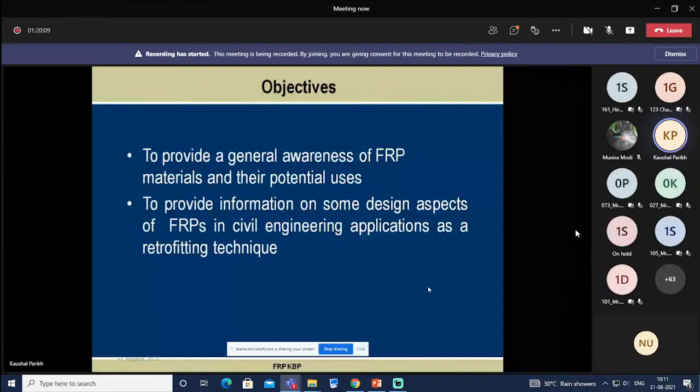Now, let us start with the introductory part. We know that humankind, for so many millennia, has used stone and timber for construction purposes as building materials from the structural point of view. And for the last 200 years, steel and concrete have been very, very popular, and there are so many buildings, so many types of structures which have been constructed using these two materials, specifically steel and concrete.

So the modern urban landscape is defined basically by steel and concrete: roads, sewers, highways, buildings, bridges, and many, many complex infrastructures which have been made specifically of steel and concrete. Now, as we know, most of the world's population depends on a major, extensive infrastructure system.

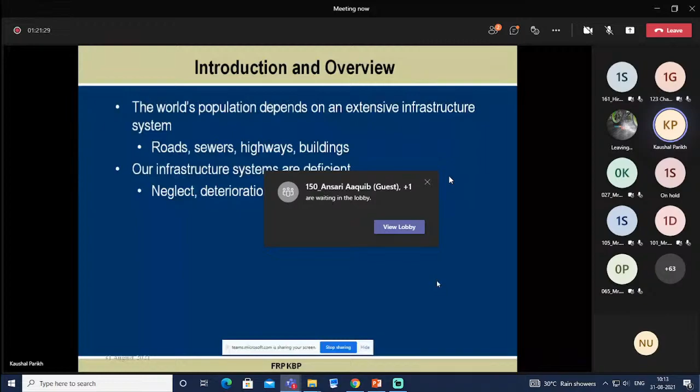But when we are using these infrastructure systems, which have been made specifically of steel and concrete, then definitely, because of the limitations of each individual material, deficiencies will be generated. They become deficient for certain reasons, and because of those reasons, we have to think how we can prevent this deterioration, and if deterioration is there, then what to do for those structures.

So as one of the best solutions, lasting for 20 to 30 years, FRP, that is fiber reinforced polymer material, is gaining popularity as far as civil engineering is concerned. As the history and the literature review show, FRP was mostly used in the aerospace industry as well as mechanical engineering. But now it is gaining popularity as far as civil infrastructure application is concerned.

And the reason behind this is that the FRP cost has decreased. Why has the FRP cost decreased? Even though I belong to one of the small cities of Gujarat, within the surrounding area of 180 kilometers, FRP products are manufactured in industry. It is true. So in the past, only some companies made FRP, but now there are various companies making FRP. Hence, because of that, the cost has decreased.

So now there are certain reasons that lead to degradation of existing structures. One of the reasons is corrosion. We know how corrosion takes place, so I will not discuss much what exactly is going on. But the final product is seen here: what really happens and how the strength has decreased because of corrosion is shown with the end results.

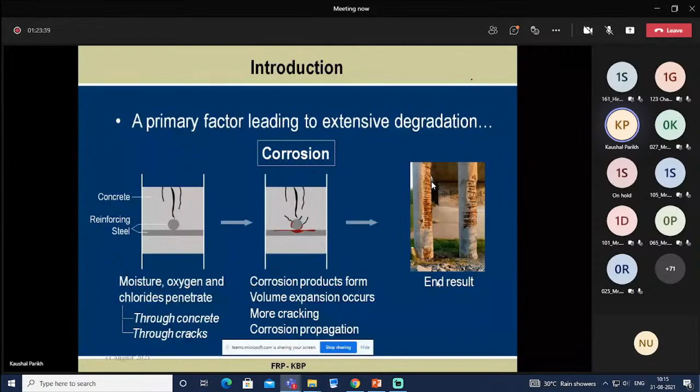Another reason for deficiency in existing structures is environmental effects, like wet and dry conditions, freeze and thaw conditions, and chloride ingress in the existing structures; the existing material will behave accordingly and deficiency will be generated.

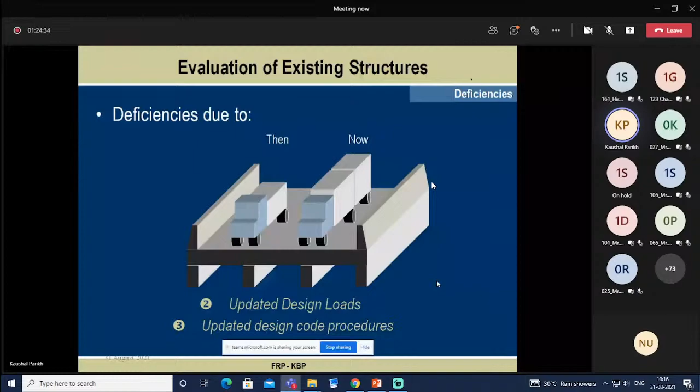Another reason evaluation of existing structures is needed is that deficiency is generated because of updated design loads and updated design code procedures. Also, because the population increases and new developments are there, the traffic will be heavier, and because of that the existing structures will become deficient. Another reason, as I told, is that traffic increases. These are certain reasons deficiency will be generated.

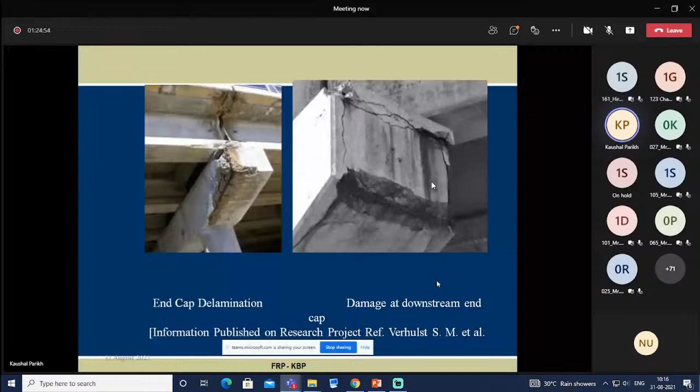Deficiency will also be generated because of seawater, as shown in the figure. These are certain deficiencies, like the end cap delamination as far as the bridge is concerned. See the various images. And specifically, earthquakes will lead to damage in existing structures.

So two types of questions may arise in our mind: why should repair, restrengthening or retrofitting be carried out with the same material? It means, why should it be carried out with steel and concrete itself, and why are we going to repeat the cycle? In the same scenario, if we do the repair with the same material, then a similar kind of deficiency may be generated.

So why are we not switching to another new, innovative material, that is the FRP material, because of certain advantages? The first is light weight. It is very lightweight in comparison with concrete and steel, so it is very easy for us to install anywhere.

It has a high strength. I'm going to show you the next slides, which clearly show that it has a very good high strength, approximately 5 times that of steel. Obviously, it is corrosion resistant, with respect to certain ones.

When we discuss durability in the same series, you can see that certain FRPs may lead to some corrosion with certain chemicals. But for the majority, the corrosion that affects steel does not occur in FRP, which means it is a durable one. Also, it is a highly versatile material, meaning it can be used for any kind of project and you can put it at any place.

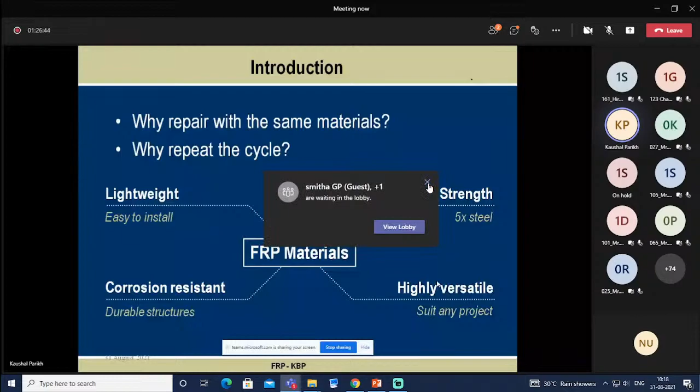Now, there are certain reasons for the need for composites. As we know, a composite is a material which is a combination of two or more materials. One of the reasons stated here is high strength and stiffness, meaning FRP has a very high strength and stiffness to weight ratio, and it is approximately 2 to 10 times as strong as steel plates, while the weight is only about 20% of that of steel.

This property enables thinner sections designed for longer spans, as well as ease in site handling for laborers, and that reduces the labor cost also. Weight reduction adds seismic resistance, speeds erection, and saves construction cost due to the reduced weight of the structure.

As I stated earlier, it has a high corrosion resistance. Also, it has a non-magnetic property. It has low creep and better fatigue life; creep and fatigue are two words we frequently use as far as concrete is concerned. But here FRP has low creep and better fatigue life, better thermal properties, lower maintenance cost, and, importantly, flexibility of shape.

Because of that, it is possible to produce FRP products in various shapes and sizes like cables, rods, flat bars, panels, reels, fabric, sheets. So this offers a great flexibility as far as shapes and sizes are concerned.

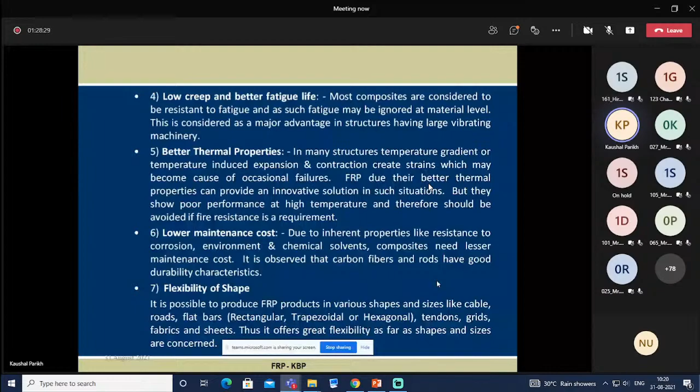While for steel, a major ductile behavior is seen after the yield point. So the advantage of FRP is that it has a higher capacity to resist load, a very high load carrying capacity. But the disadvantage, as you can also see, is ductility: steel is a ductile material, while FRP is nothing but a brittle material.

So here some typical properties are shown, the same thing we discussed in the previous slide. One important thing is that FRP has a lower strain at failure, which leads to brittle behavior.

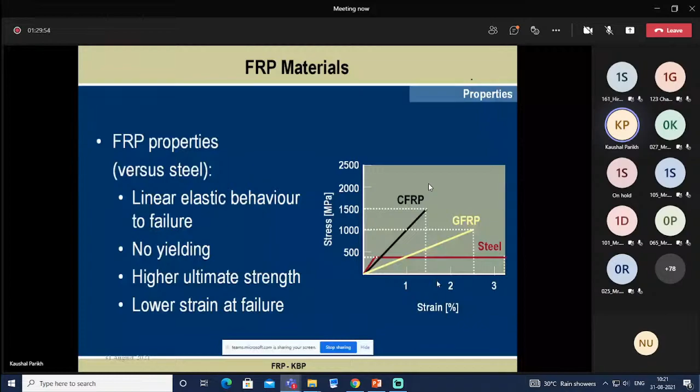So what is FRP? FRP is not a single material, but a composite material which is a blend of high strength, high modulus fiber and a hardenable liquid matrix. It is the summation of the fibers plus the matrix.

So the physical and chemical properties of fibers and matrix resins are to be discussed here, because the fiber has its own properties, the matrix has its own properties, and when we combine them, the property is slightly different from both constituent materials. So the bonding of the aligned fibers by the softer matrix results in the FRP composite material, which has superior properties, specifically in the fiber directions, if we apply it in the existing structure.

So exactly, the definition of FRP is a material which is created by the combination of two or more materials on a macroscopic scale to form a new and useful material with enhanced properties that are superior to those of the individual constituents alone. We know certain composite materials like concrete.

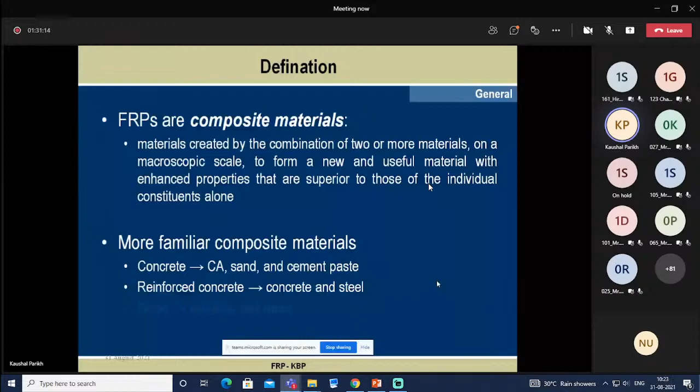Reinforced concrete is also one of the composite materials, that is, concrete and steel. Wood and our bone are composite materials. Similarly, FRP is also a composite material. Now, in this FRP, 50% to 65% will be carried by the fiber part and the remaining part by the polymer resin matrix.

Both materials have their own uses as far as the composite is concerned. The fiber reinforcement carries the load in the design directions, and the fibers, being the main load carrying constituent, give FRP its strength. So the question may arise, what is responsible for the strength in FRP? It is nothing but the fibers, while the polymer resin matrix has a lower load carrying capacity,

and the resin acts as a medium to transfer the stresses between the adjoining fibers through adhesion, and also provides protection for the material from UV and chemical damage. So here, one thing is to be noted, that the polymer resin matrix doesn't provide the load carrying capacity, but it provides the bonding between the FRP and the older construction.

So it is also an important one. We can't say that only fibers are important; the polymer resin matrix has its own value here. And whenever a certain failure is considered, this polymer resin matrix will become a weak link.

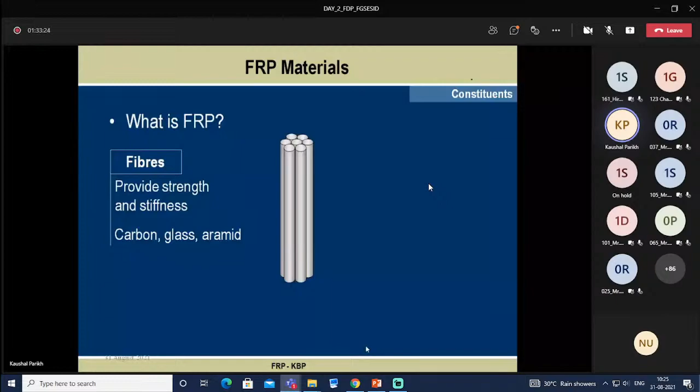So now, what is FRP? As we discussed, there are two parts: fibers and matrix. The matrix protects and transfers the loads between the fibers. Three types of fibers have been written over here: glass, carbon, aramid, and three types of matrices are shown over here. We will discuss the types of matrix in detail in the next slides.

So when we combine the two things, fibers and matrix, we get an FRP having an intermediate strength, not more than the fibers, not less than the matrix. Now, the polymer matrix component has critical functions. First, it binds the fibers together,

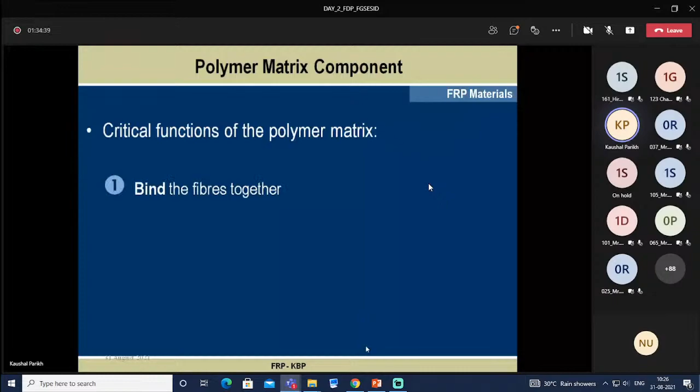it protects the fibers from the environment and abrasion, it separates and disperses the fibers throughout the composite, and it transfers the force between the individual fibers. A very interesting and important point: it transfers the force between the individual fibers.

So now, what is a polymer? A polymer is an organic compound comprised of long chain molecules consisting of smaller repeated units called monomers, and there are two types: thermoplastic and thermosetting polymers. Examples of thermoplastics are polyethylene, nylon, polyamide, while thermosetting polymers are polyester, vinyl ester, epoxy.

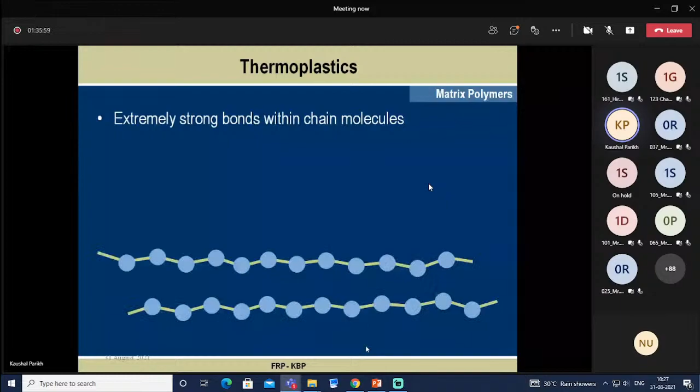Now, if we take the first, the thermoplastic as a matrix polymer, it has extremely strong bonds within the chain molecules. You can see in this image that along the molecules there is very high strength, good strong bonds. But these chains are held by weak van der Waals forces, and because of the weak van der Waals forces, the molecules can slide past one another on heating.

So because of heating, this becomes non-stable. The polymer can be reversibly softened, and hence it is not currently used from a civil engineering perspective. But in thermosetting polymers, the molecular chains are cross-linked through chemical bonds.

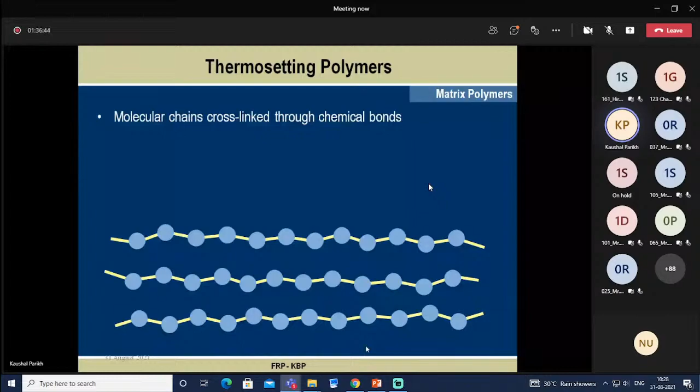There are good, strong bonds along the molecules, but they are cross-linked through very strong chemical bonds, and hence they cannot be reversibly softened and cannot be bent on site. So there is very little possibility of deterioration at elevated temperature. So this is the matrix, specifically the thermosetting type of polymers commonly used for infrastructure FRP, and those are the epoxies, vinyl esters and polyesters.

Let us understand first the polyester and its use, then the vinyl ester and its use, and then the epoxy and its use. Polyester is inexpensive, easy to process and widely used for FRP components. Just like we know the railway track is made from the I section of steel, similarly when you pass along the roads, visualize a high tension line going on, and fencing carried out.

In certain places the fencing, the channel sections, or certain vertical angle sections are not made of steel, but of FRP components. As far as I know, in Gujarat various factories are making this kind of FRP component, and in that case they are using polyesters. The vinyl ester is specifically used for FRP bars, meaning reinforcement.

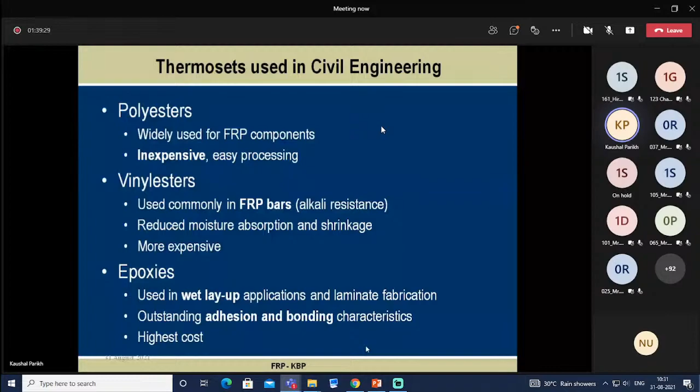The factors influencing fiber suitability for any project are strength, stiffness, environment and durability, cost and availability. Cost is one of the major influencing criteria. And if cost is not a concern, then strength is one of the influencing criteria.

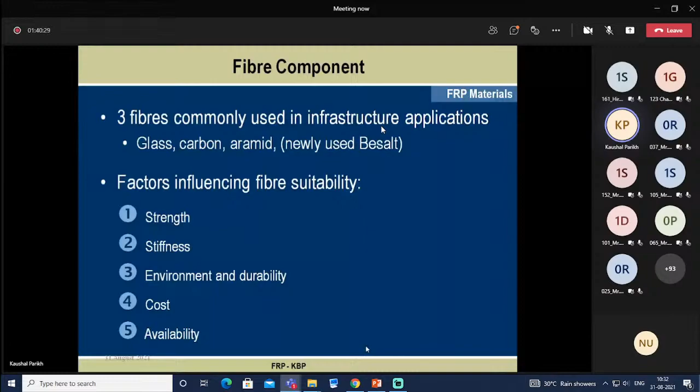Now, if we study glass fibers, we all know that in concrete people use glass fiber as an individual addition. That we are not discussing right now. The glass fiber FRP sheet that we are going to discuss is inexpensive, lower cost compared with the alternatives, and easily available in the market. There are types like E-glass and R-glass, the resistance type, having higher strength, moderate modulus and medium density. Generally, glass fiber FRP is used for non-weight and modulus critical applications.

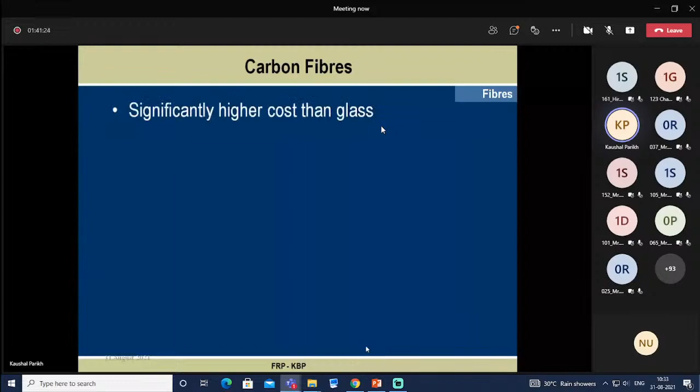Carbon fibers are significantly higher in cost than glass, with various varieties available in the market, but compared with glass they have higher strength, superior durability and fatigue characteristics, and a very high modulus.

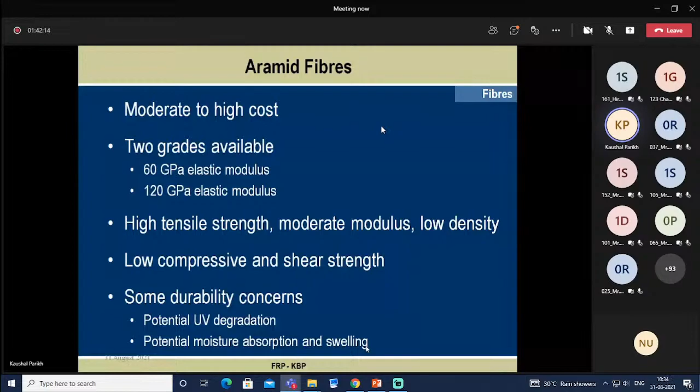Another one is aramid fibers, having a moderate to higher cost. Generally two different grades are available in the market: 60 GPa elastic modulus and 120 GPa elastic modulus. It has a high tensile strength, moderate modulus, and low density. But there are some specific durability concerns: it tends to degrade because of ultraviolet rays, as well as potential moisture absorption causing swelling.

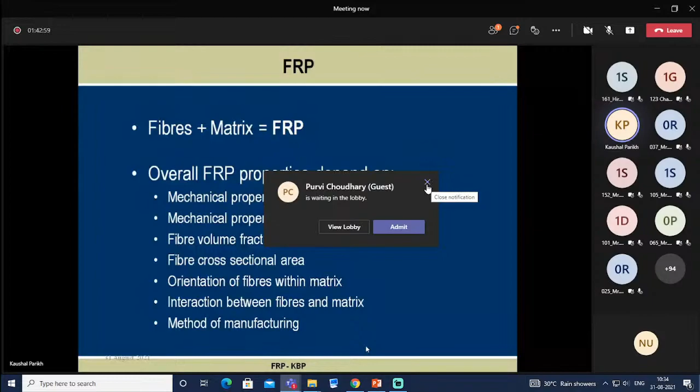As discussed, fiber plus matrix is FRP. As far as structural application is concerned, overall FRP properties depend on the following factors: mechanical properties of matrix as well as fibers, fiber volume fraction and fiber cross-sectional area, and importantly, the orientation of fibers within the matrix, which is a key factor. Other factors are the interaction between fibers and matrix, and the method of manufacturing, which also affects the final properties of FRP.

Now, the influence of fiber orientation and its specific use. As we know, FRPs are orthotropic materials, meaning they are directionally dependent. In the market, various FRP laminates for retrofitting are available.

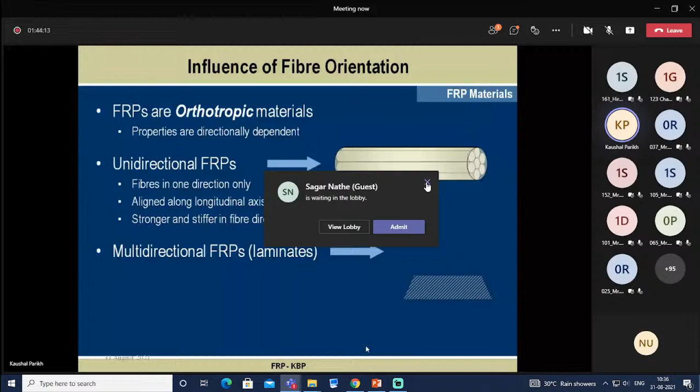One of them is unidirectional FRP. In this case, the fibers lay in one direction only, aligned along the longitudinal axis. During structural use, we apply these FRPs in such a way that we can use that strength, so it is stronger and stiffer in the fiber direction.

Now, switching to multi-directional FRP laminates, fibers in various directions are manufactured, majority in two directions, so the properties can be tailored and the behavior can approach isotropic. Unidirectional FRP is commonly used in infrastructure applications, but in certain cases bidirectional or multidirectional FRPs are also used for structural applications. A typical image shows the various types of FRPs and their components.

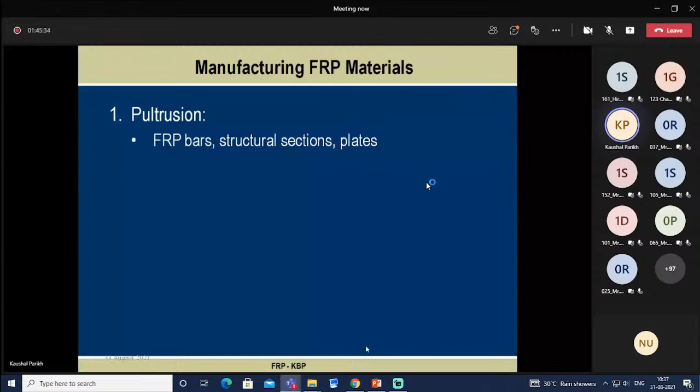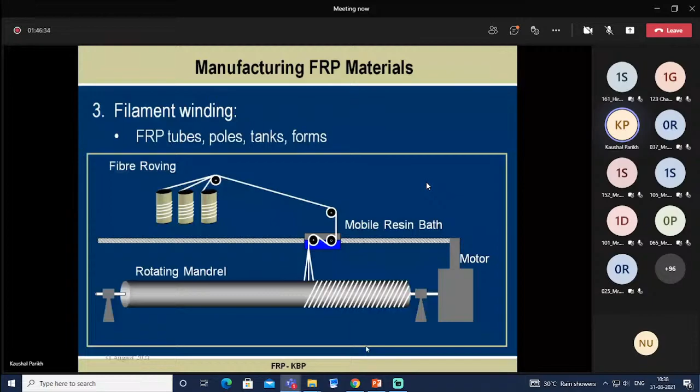Another technique is filament winding, from which FRP tubes, poles, tanks, and forms are made. A typical image has been shown here.

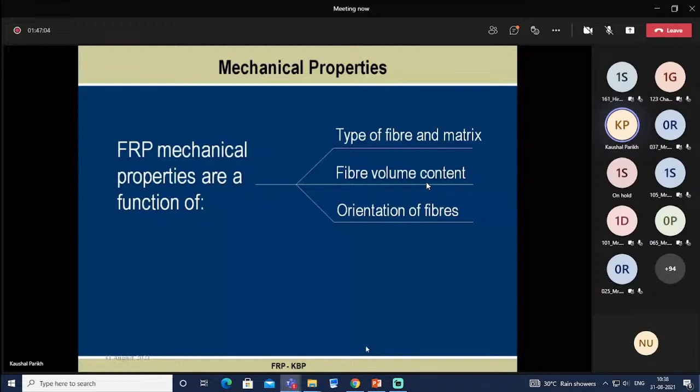The FRP mechanical properties are a function that majorly depends on three factors: the type of fiber and matrix, fiber volume content, and orientation of fibers. Now some typical example applications have been shown, related to where and under which circumstances FRP is to be used.

For shear, we know that shear strengthening of the beam is generally taken care of near the support conditions, specifically on the side of the beam. Here the FRP is applied for shear strengthening on the side face of the beam, or we can apply a U-wrap. The fiber directions here are perpendicular to the longitudinal axis of the beam.

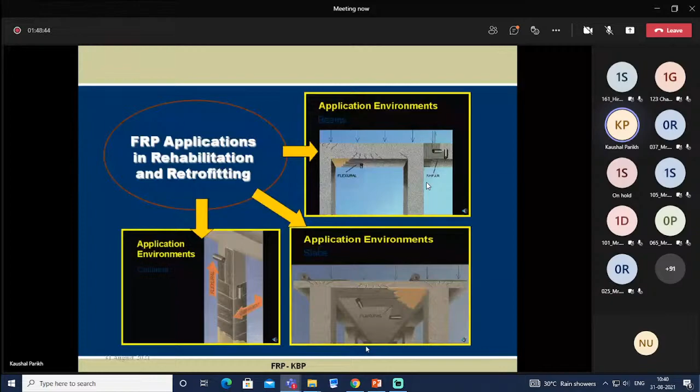Let us discuss the installation technique. The first one is the wet layup application, used with flexible sheets saturated with epoxy adhesive. This can be applied on the flexible sheets in one or two coats, and that has to be placed on the concrete surface.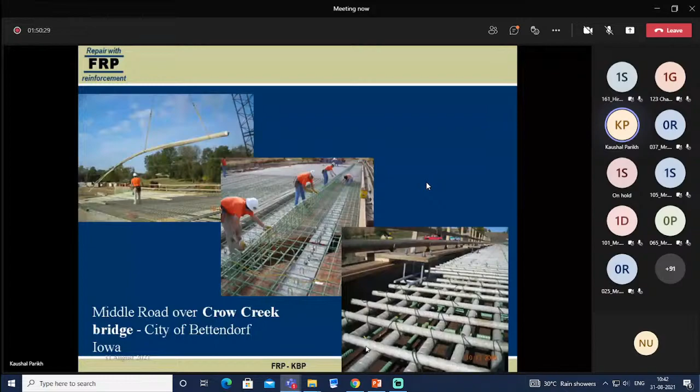One of the typical applications has been shown here. Some case studies are shown, this is one typical example of FRP bars. This is an application where re-strengthening of the masonry wall and the RCC slab used pre-cured CFRP strips. There are two different terminologies: strip and sheet. Sheet is a very flexible terminology, while strip has slightly more thickness, giving it a kind of rigidity in comparison with the sheet.

Another typical example shown here is the San Francisco City Hall building, which was retrofitted in the mid-90s. You can see how old this building is that was retrofitted. The basement of this building included a number of hollow clay tile walls that were weak in shear, as seen in the image.

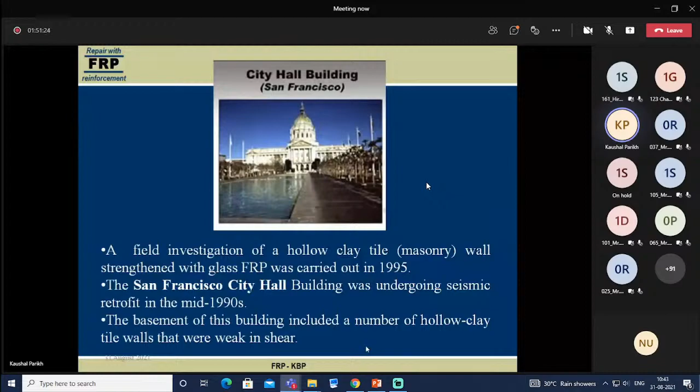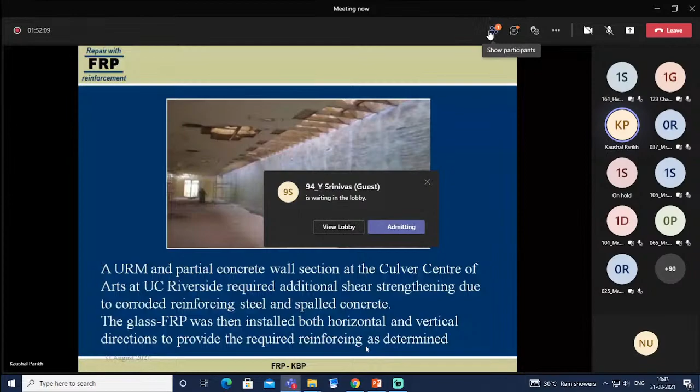One typical example: URM and partial concrete wall sections at the Culver Center of the Arts at UC Riverside required additional shear strengthening due to corroded reinforcing steel and spalled concrete. Glass FRP was installed in both horizontal and vertical directions to provide the required reinforcing as determined by calculation.

Now let us look at the Indian scenario, with certain applications specific to India. As we know, humidity cycles accelerate deterioration in concrete, and India has monsoons with 80% of rain falling within 2 months. Because of this humidity, there is definite deterioration to be accounted for. The marine environment is the worst in India, which has a long coastline where marine weather prevails. So in India, structures require heavy repair within a decade of construction.

We know how construction is also carried out by contractors in the nearby area, so deterioration will need to be addressed in the near future after construction. There is a huge scope for strengthening and retrofitting in India. The overall composite market in India is relatively small compared to other parts of the world. A few years ago, the consumption level of composites in India was only 30,000 metric tons, compared with China's 2 lakh metric tons.

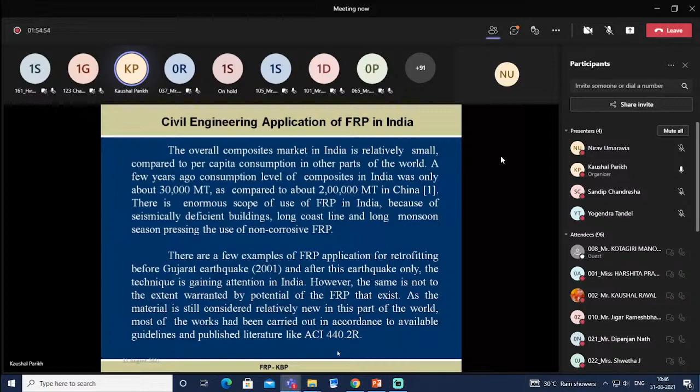In India, in the field of education and research related to FRP construction, various IITs, IISc, the Structural Engineering Research Center (SERC Chennai), FRP Institute Chennai, the Indian Society for Advancement of Material and Process Engineering with headquarters in Bangalore, and also DRDO are certain agencies doing testing and research work, and this is ongoing.

Now let me discuss the first case study: the case study of Bhopal, where there was a problem with the old age home. The consultant was Skyline Consulting Engineer. Here the project was to strengthen the columns at the basement level. The name of the building itself, old age home, tells us its function.

This structure was newly constructed having 5 floors, and this 5-story old age home showed signs of cracks at the basement level columns immediately during the finishing stage of the project. Standard NDT tests were conducted and they concluded that the columns had not achieved the required grade of concrete. So we can see how the construction was carried out at the initial stage. One of the options taken was to use FRP jacketing at these locations.

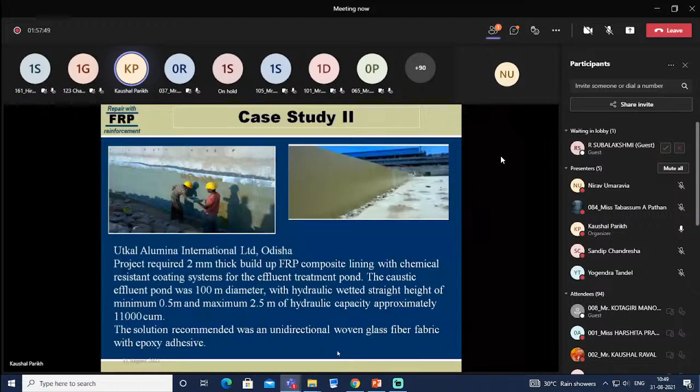This is the third case study, of Kolkata Ahinsha Properties, where strengthening of the column with externally bonded FRP was used. This building is located at the heart of Kolkata, and the project requirement was the strengthening of the column needed because of the additional loads of a proposed swimming pool on the roof of the building.

After so many years of use, they proposed to build a swimming pool on the roof, so huge loads would come onto the building. The solution was the use of externally bonded FRP material by confinement to increase the compressive strength of the RC columns, using certain design guidelines. In each case, they used certain guidelines since there is no Indian standard for this even today. So they used FIB Bulletin 14 Switzerland guidelines based on the information available.

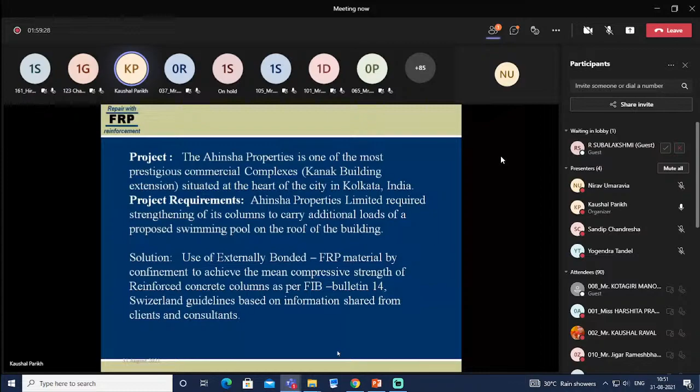Another case study is the Bharti Airtel Data Center in Bhubaneswar, Orissa. This building was made in 2012, and the data center is located at the center of Bhubaneswar, Odisha. Due to technical requirements, strengthening of the beam, slab, ceiling, and columns was needed to accommodate the additional load of the UPS.

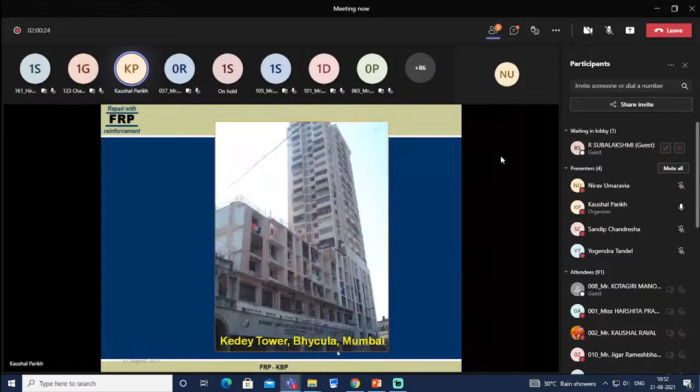Kedey Tower, Byculla, Mumbai. One of the images has been shown over here. Here the problem statement is there. This particular building was proposed for another 4 stories on top of the existing 20 stories. So originally the building was made up of 20 stories, so the design had to be carried out for the 20 stories to take care of the loads.

But when we go for the proposed new 4 stories, strengthening of the existing components of the structure has to be carried out. The load carrying capacity of the main columns was good enough to carry the extra load according to the previous Indian code. But according to the revised Indian Standard code, the factor of safety of the main core columns required to be enhanced, and they found a solution of one layer of CFRP applied parallel to the axis of the column

to prevent buckling. Please try to understand that the FRP sheet is applied with respect to certain directions when we are using the unidirectional one, as the unidirectional one is gaining popularity from the infrastructure point of view. And 3 layers of CFRP are applied perpendicular to the axis of the column for the confinement. See the image after the construction of the 4 stories.

The next is the Century Hotel, Mumbai. Another case study is there. This is the problem of one of the beams. It has been clearly shown that the original depth of the beam is 1150 millimeters, and for a certain reason they want to reduce the depth of the beam, cutting it down by 350 mm. They want to remove the upper portion of the beam so that the upper floor can be used.

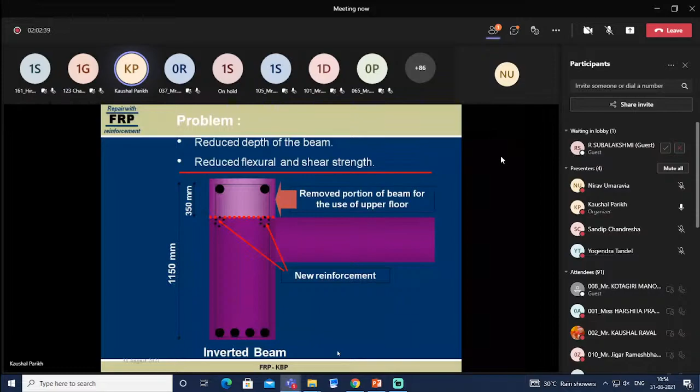So definitely, as the top reinforcement bars have to be cut and the depth has been cut down, there will be a drastic reduction in the flexural and shear strength. So here the solution, as shown in the image, is CFRP applied at the bottom to increase the flexural strength of the beam, as well as wrapping near the support. You just see the figure. This wrapping is applied at the end of the beam as a U-wrap to increase the shear strength of the beam.

And I repeat that this is not carried out arbitrarily. Use certain guidelines, and based on those design guidelines we have to carry out the design procedure and systematically use this in the real application. Certain images are shown over here. These are certain images for the same thing.

The last case study is about the Chennai Corporation in Tamil Nadu, India, which used fiber wrap technology maybe 10 to 12 years ago to fortify its old civic structures, including buildings and bridges, against earthquakes. The fortification was initiated in the wake of the city being upgraded to seismic zone 3 a few years ago. Also, the work on the Kodambakkam Bridge and Ripon Building, more than 150 years old, has already been completed by the Chennai Corporation. So FRP as a retrofitting material is exhaustively used in India also.

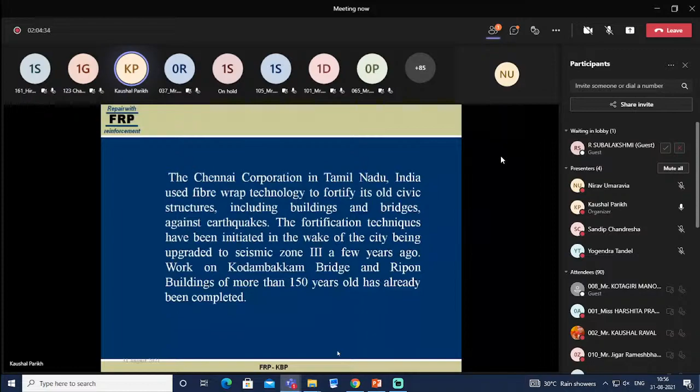Let me explain the FRP application procedure. First, remove all unsound concrete and loose particles. Then arrest the corrosion. If there is corrosion, remove that particular part and restore its original shape. Grind the corners and make the surface smooth and undulation free. Then apply the adhesive, made up of two different components, the primer and saturant, as far as the wet lay-up application is concerned.

After application of the adhesive, press the FRP wrap or strip by hand. Then use a roller to remove the entrapped air. Put another coat of adhesive and then apply protective coatings. See certain images. I have a 1-minute video to show over here. First, open the pore structure, remove the laitance, paints, debris, curing compounds, etc. Make a clean surface so that the contact between the FRP and the older structure is proper.

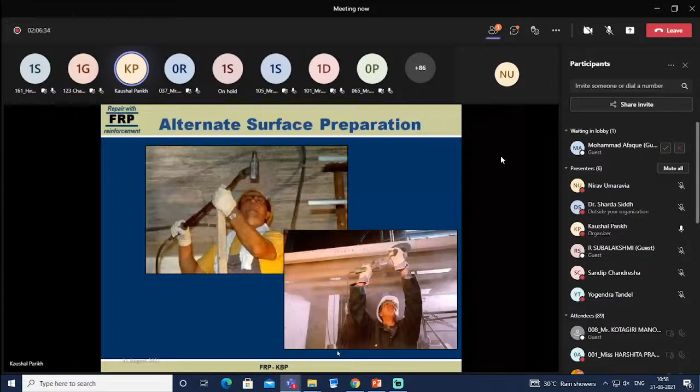And this is also the procedure of the alternate surface preparations. See here, the curved surfaces have to be carried out so that there should not be any kind of stress concentrations; the connections at the junction will be taken care of. So round corners of a specific radius have to be made, removing all the imperfections and laitance; smoothing and levelling have to be carried out.

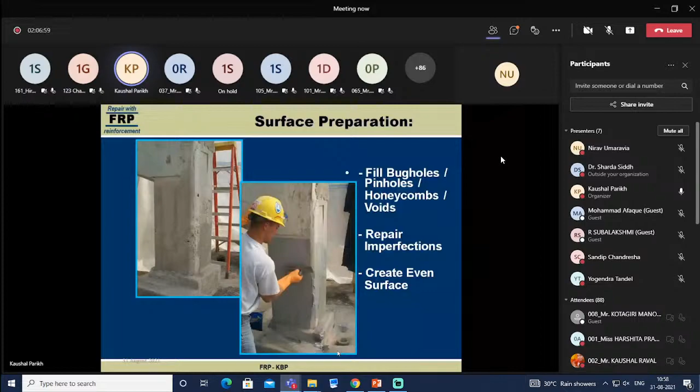Fill up the bug holes, pinholes, honeycombs, voids, repair the imperfections and create an even surface. Then apply the priming to the substrate. Now, depending upon the manufacturing company, certain companies tell us to apply the priming before application of the FRP sheet and carry out the curing of the priming for 24 hours.

Certain companies say 48 hours, certain maybe 12 hours, depending upon the manufacturing company and its regulations that we have to follow during the retrofitting. So this priming will create a feasible environment for the FRP sheet for the applications to the older structures.

Then applications of the FRP. So now one image clearly shows the manual wetting. Manual wetting means what? After the curing period of the priming is over, apply the FRP on the structure and then apply the saturant, another chemical, that is epoxy. So that is nothing but application of two different components of FRP directly at the site. That is the manual wetting.

And the secondary image shows automated wetting. It means the epoxies and FRP are ready-made at the factory and directly applicable; just apply the sheet on the concrete surface. Some typical examples or applications are shown here in certain images.

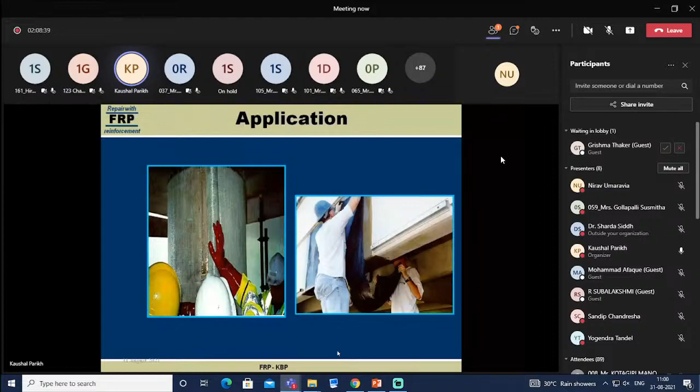So after application, the air voids between the older structure and the FRP have to be removed. And this is the finished product. In finished products, we can apply coatings for aesthetics, UV protection, and heat protection as shown in the figure. Now, let us continue. Before I switch to the durability aspect, let me show you a 1-minute video.

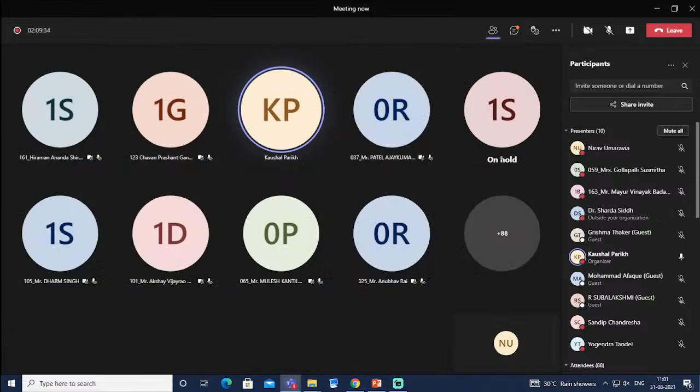Protect. Nirav sir, is it visible? Tandel sir, is it visible? Is it visible? The video of 1 minute is visible. The voice is not there. No, sir, not yet visible. Just 1 minute, hold on. Tandel sir, is it visible?

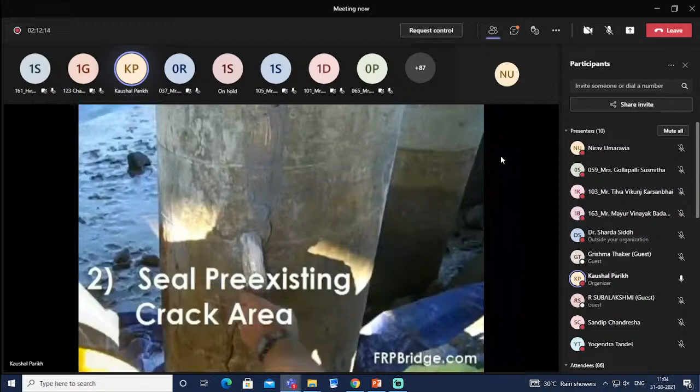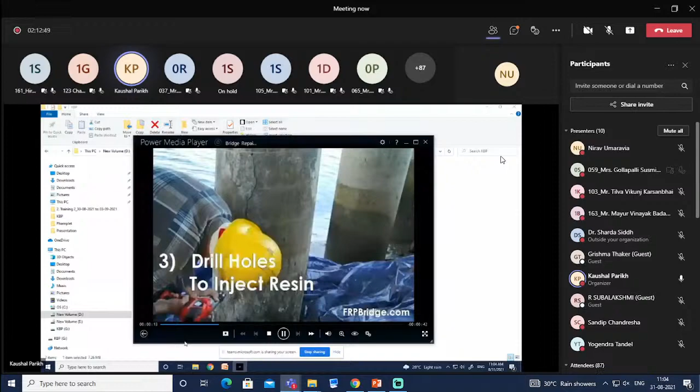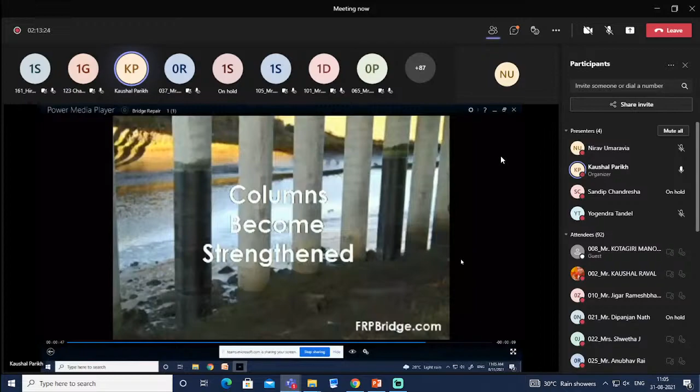I think just remove that one. I just have to tell you. Now, I think my voice is clear.

Now, here you can see the wet application of the FRP which has to be carried out. Let me continue with the durability aspect. Durability concerns. Now, the question may arise, what exactly is durability?

The ability of an FRP material to resist cracking, oxidation, chemical degradation, delamination, wear, and/or the effects of foreign object damage for a specified period of time under the appropriate load conditions and the specified environmental conditions. So this is the wide perspective as far as the term durability is concerned.

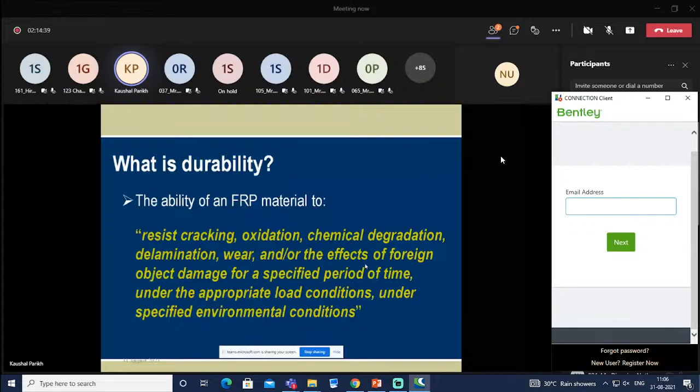Some voices there, Nirav sir, Tandel sir, Hussein, some typical voices there. Yeah. Somebody has opened their microphone.

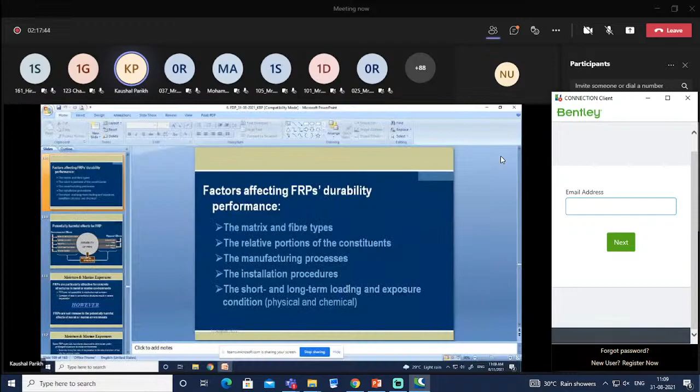Now, the factors affecting FRP's durability. One is, as I stated, the types of matrix and the types of fiber, which affect the durability performance. We discussed the matrix types in the earlier slides. We discussed the types of fibers also. The relative proportions of the constituents also affect FRP's durability performance.

The manufacturing process of the FRP also affects durability. Installation procedure is also one of the factors. The short and long-term loading and exposure conditions also affect durability performance. So, what are the issues related with the durability of FRP? One is moisture and marine environments. That is the environmental effects we are discussing.

Another is alkalinity and corrosion. Third one is heat and fire. Then the cold and freeze-thaw cycle. UV radiation, ultraviolet radiation. These are the environmental effects which affect the durability of FRP. And the physical effects are sustained load, that is creep, and cyclic loading, that is fatigue. Some of this we are discussing today. Now let us take the first one, that is moisture and marine exposure.

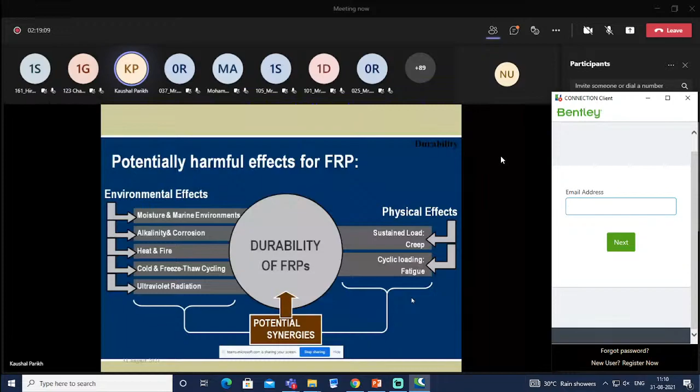FRPs are particularly attractive for concrete structures in moist and marine environments, as FRPs are not susceptible to electrochemical corrosion like steel is. Corrosion of steel in conventional structures results in severe degradation, but FRPs do not. But even so, research states that FRPs are not immune to the potentially harmful effects of moist and marine environments.

Certain evidence links the rate of degradation to the rate of sorption of fluid into the polymer matrix, which will degrade the FRP to a certain extent. All polymers absorb moisture, and depending on the chemistry of the specific polymer involved, that can cause reversible or irreversible physical, thermal, mechanical, and/or chemical changes.

So it is important to recognize that laboratory test results do not necessarily indicate performance in the field. Here the field observations are more important than laboratory observations. Some selected factors which affect moisture absorption of FRP are the type and concentration of liquid, type of polymer and type of fiber, and fiber-resin interface characteristics.

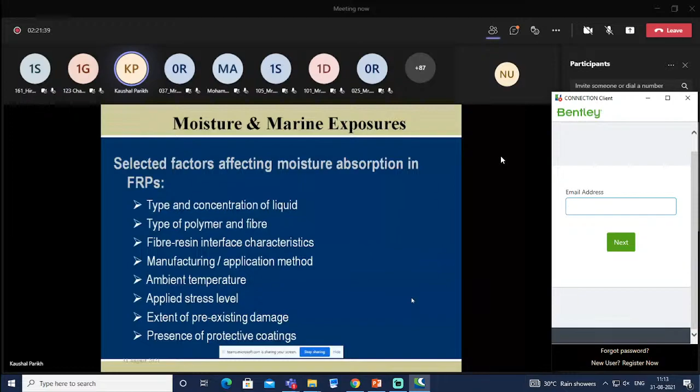Now, the overall effect of moisture absorption is plasticization of the matrix, caused by the interruption of van der Waals bonding between the polymer chains, which reduces the matrix strength, modulus of elasticity, strain at failure, and toughness. Subsequently, it reduces the matrix-dominated properties, which are bond, shear, flexural strength, and stiffness.

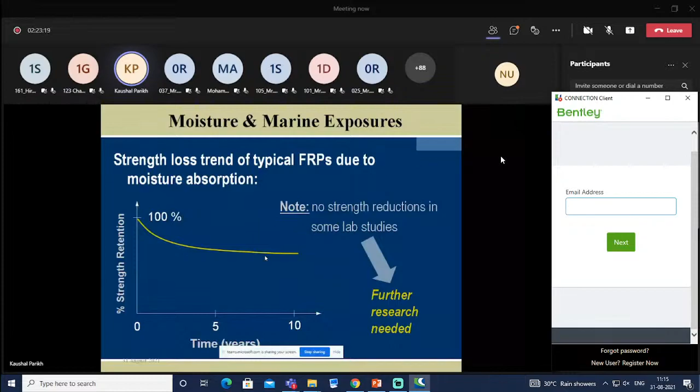So no strength reductions in some lab studies is also there. So here it is important that further research is needed about the strength loss because of moisture and marine exposure.

There are certain potentially important detrimental synergies: moisture absorption along with sustained stress and elevated temperature can induce micro cracking of the polymer matrix. This microscopic view clearly shows the micro crack which has been generated because of the insertion of moisture at sustained stress and at elevated temperature.

Now, let us see the effect of moisture and marine exposure with respect to the type of fibers used in FRP. As far as glass fiber is concerned, moisture penetration to the fibers may extract ions from the fiber and result in pitting, which can cause deterioration of the tensile strength and elastic modulus to some extent. In the case of aramid fibers, it can result in fibrillation, swelling of the fibers, and reductions in compressive strength, shear strength, and bond properties.

Certain chemicals, such as sodium hydroxide and hydrochloric acid, can cause severe hydrolysis, which is dangerous to FRP, specifically aramid fiber. Carbon fibers are very little affected by exposure to a moist environment.

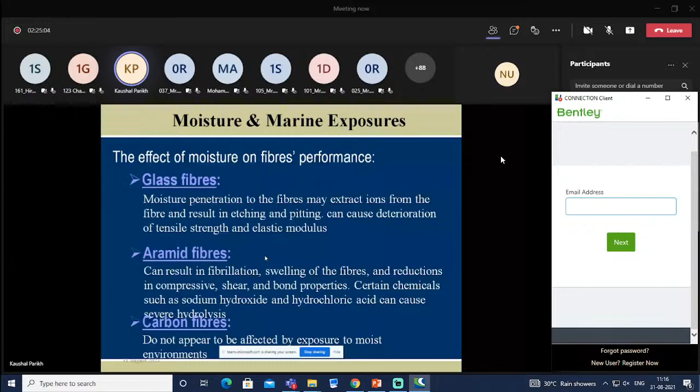Specifically concerning the effect of different matrix resins with respect to moisture and marine exposure, FRP can be protected against moisture absorption by appropriate selection of the matrix materials and protective coating. Vinyl ester is currently considered one of the best for preventing moisture effects in infrastructure composites. Epoxy is also considered adequate, while for polyester, available research suggests poor performance and it should be avoided.

Now, the second important factor of durability is alkalinity and corrosion. Generally, a pH level greater than 11 inside the concrete is considered a highly alkaline environment. That becomes important for internal FRP reinforcement applications in concrete. One image has been shown here, and the pH level of that concrete is greater than 11.

Because the pH level is greater than a certain range, an alkaline environment is created, and because of that, there is damage to the glass fibers as far as the reinforcement is concerned. Here it depends on the protection by the matrix and temperature. It affects the glass fiber, but we have to check what the protection of the matrix on that particular fiber will be.

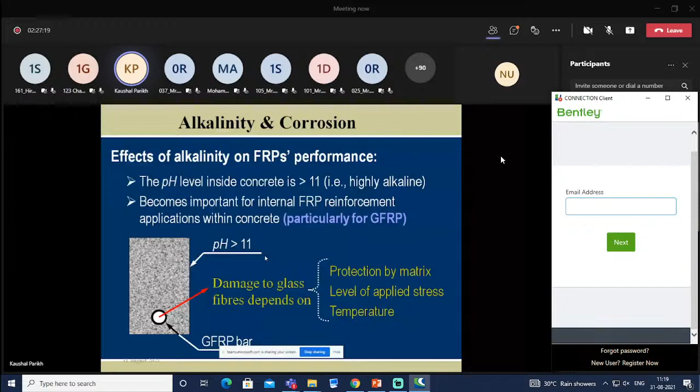Now, regarding the effect on individual fibers in an alkaline environment: for E-glass fiber, the strength will reduce by up to 75% in comparison with the initial values, while AR glass fibers, as AR suggests, alkali-resistant glass fibers, show significant improvement in the alkaline environment, but at a higher cost in comparison with E-glass fibers.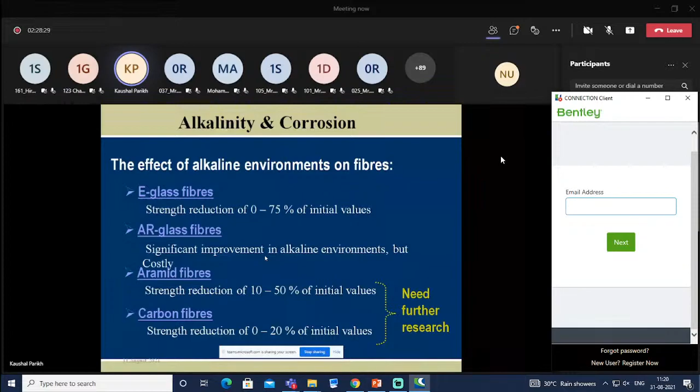Another terminology is galvanic corrosion, which relates specifically to corrosion of steel. FRPs are not susceptible to electrochemical corrosion, but certain FRPs, specifically CFRP, can contribute to increased corrosion of metal components through galvanic corrosion. Researchers suggest that the FRP can lead to higher corrosion of the steel component.

So let us understand what galvanic corrosion is. It is nothing but the accelerated corrosion of a metal due to electrical contact with a non-metallic conductor in a corrosive environment.

Now, guarding against galvanic corrosion: the CFRP should not be permitted to come in direct contact with the steel or aluminum in structures, because it leads to higher corrosion of the steel, the metal parts. So if we take internal reinforcement, then we have to provide plastic spacers between the steel and CFRP bars so that there is no direct contact of the CFRP reinforcement with the steel reinforcement.

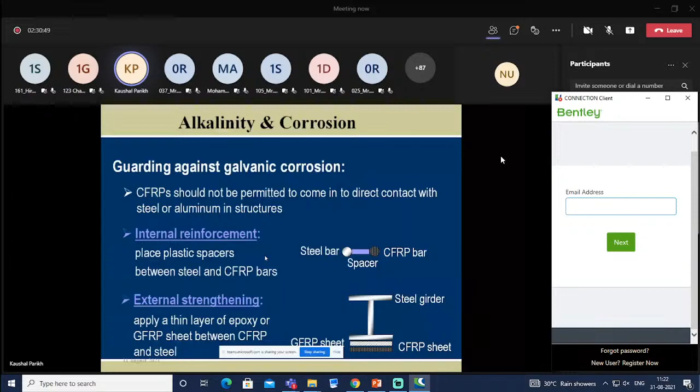The third very important factor as far as durability is concerned is high temperature and fire. As I repeat, it is a very important concern. Now, FRP materials, as we know, are widely used for reinforcement. They are also used for retrofitting, rehabilitation, and strengthening of bridges, for wet layup systems, and for outdoor structures.

When used outdoors, they will definitely be directly exposed to the temperature of the sun. FRPs have seen comparatively little use in building applications for certain reasons. FRP materials are susceptible to elevated temperature. There are several concerns associated with their behavior during fire or in higher temperature service environments, and research shows that beyond a certain temperature level, they will be affected much more.

So we cannot make a generalized statement regarding the higher temperature behavior of a specific FRP, but it is true that elevated temperature will definitely affect the FRP. Because of the large number of possible fiber-matrix combinations, manufacturing methods and applications, a generalized statement cannot be made.

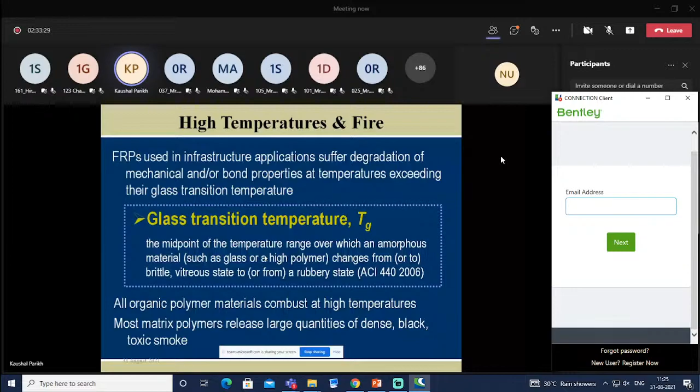Similarly, for external FRP strengthening subjected to fire or higher temperature, at a particular level the bond between the FRP and the concrete will be lost. Because there is no bond, there is no connection between the two, and both behave individually. Because of that, the strengthening application cannot be relied upon.

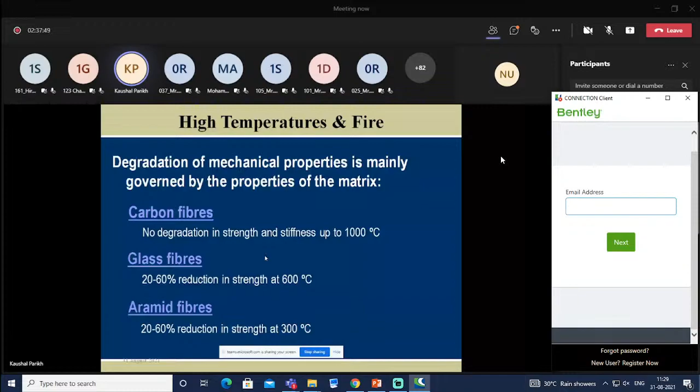So the use of FRP internal reinforcement is currently not recommended for structures in which fire resistance is essential to maintain structural integrity. Exposure to elevated temperature for a prolonged period of time may be a concern with respect to moisture absorption and alkalinity effects.

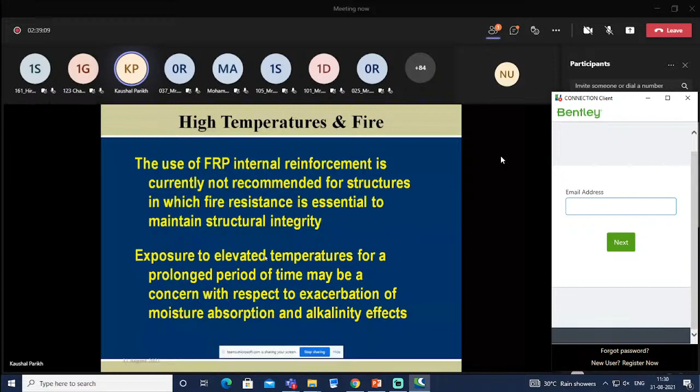Now, the next parameter is the cold temperature and its effect as a durability parameter. The potential for damage due to low temperature and thermal cycling must be considered in outdoor applications where there are lower temperature regions. So freezing and freeze-thaw cycling may affect the durability and performance of FRP components through changes that occur in the behavior of the component material at lower temperature.

Also, the differential thermal expansion between the polymer matrix and fiber components is one of the important tasks. So the cold temperature could result in damage to the FRP or the interface between the FRP components and other materials.

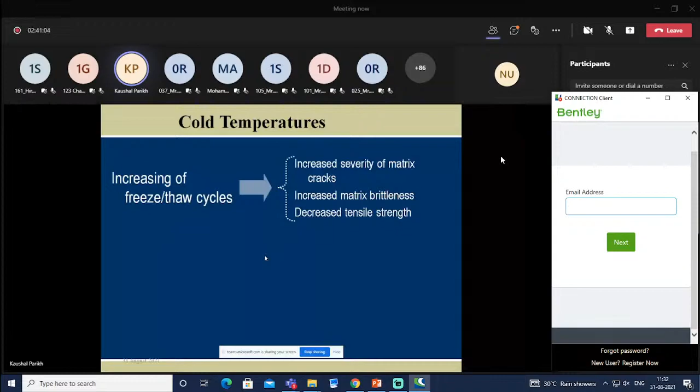So increasing freeze and thaw cycles increase the severity of matrix cracks, increase matrix brittleness, and decrease the tensile strength. However, the effect on FRP properties appears to be minor in most infrastructure applications.

Another durability aspect is ultraviolet radiation, UV radiation, that damages most polymer matrices. The effect of UV on aramid fibers is significant, but on glass fiber and carbon fibers it is insignificant. Thus, the potential effect of UV radiation is very important when FRPs are exposed to direct sunlight, in outdoor conditions. It will cause lesser damage to carbon fiber and glass fiber, but it will affect the polymer matrix resins.

Photodegradation means the UV radiation, within a certain range of specific wavelength, breaks the chemical bond between polymer chains, which results in discoloration, surface oxidation, embrittlement, and microcracking of the matrix. This is the effect of UV radiation, in terminology called photodegradation of the polymer chains, that is, the polymer matrix.

So the UV ultraviolet radiation induces surface flaws, which can cause stress concentration. The stress concentration may lead to premature failure, and this also increases the susceptibility to damage from alkalinity and moisture.

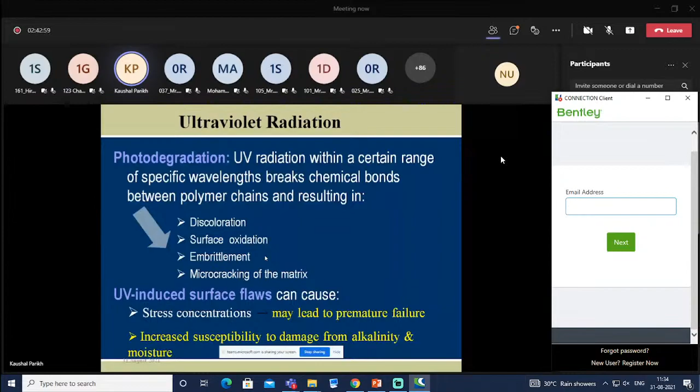Let us take some of the studies which have addressed the effect of ultraviolet rays and moisture on FRP reinforcement. We can see that for CFRP bars, the tensile strength reduces up to 20%, while for AFRP bars it reduces by 30%. So protection of the FRP from UV radiation is an important task.

The next terminology is fatigue. All structures are subjected to repeated cycles of loading and unloading due to traffic and other moving loads, thermal effects such as differential thermal expansion, wind-induced effects, or mechanical vibrations.

If we are using FRP reinforcement, or as a retrofitting technique such as an FRP sheet, for example, traffic and other moving loads create the durability aspect of fatigue. The fatigue performance of most FRPs is as good as, or better than, steel, which has been found from various research studies.

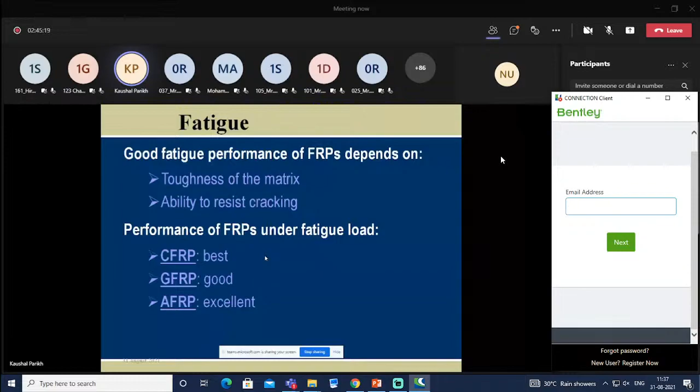There are certain reduction factors given in federal guidelines that can be used while designing any structural component with FRP, so that the durability aspect can be covered. However, the durability factor remains incompletely understood as of today, and research is ongoing. When referring to various research, durability is right now a very important criterion.

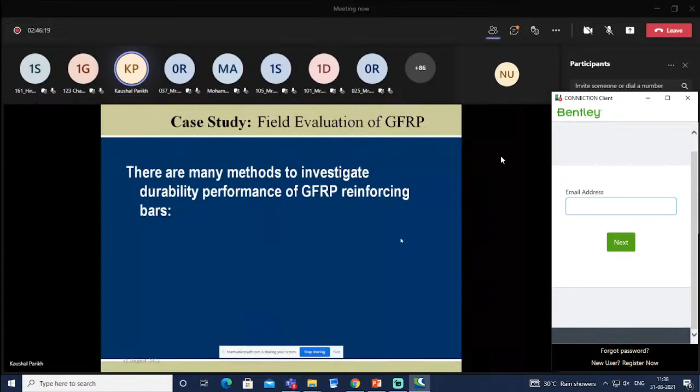There are certain reduction factors shown here, given by the code, which are to be applied during design. There are also certain case studies which show how field evaluation has been done.

Field evaluation of any kind of FRP has been carried out using different tests, such as optical microscopy, SEM scanning electron microscopy, EDS or energy dispersive X-ray analysis, infrared spectroscopy, and also DSC, differential scanning calorimetry.

This is one of the individual topics we could discuss in detail, such as how optical microscopy or SEM should be carried out and how the photography and interpretation is to be done. But that is not within the scope of this time period.

Taking optical microscopy as an example, it is used to visualize or examine the interface between the GFRP reinforcing bar and the surrounding material. It is noted that after 8 years of exposure to alkalinity, wet-dry cycles, and chloride ingress, there is no evidence of damage or deterioration, or very little damage, which can be visualized from optical microscopy.

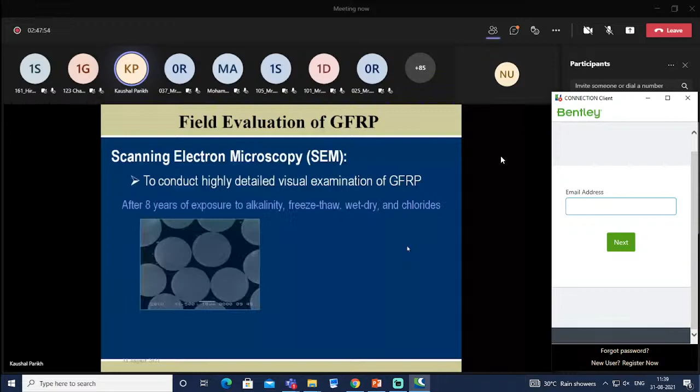SEM is useful to conduct highly detailed visual inspection of any kind of FRP. The figure shows GFRP, with an example of a bridge study, and after 8 years the existing structures with FRP show no evidence of damage.

Similarly, energy dispersive X-ray analysis was carried out and the study shows results here. Infrared spectroscopy and differential scanning calorimetry all show no evidence of damage due to alkaline intrusion.

So the important concluding remarks are that the durability performance of FRP materials is generally very good in comparison with other more conventional construction materials, but it should be equally clear that the long-term durability of FRP remains incompletely understood. So a large research effort is required to fill all the gaps in knowledge.

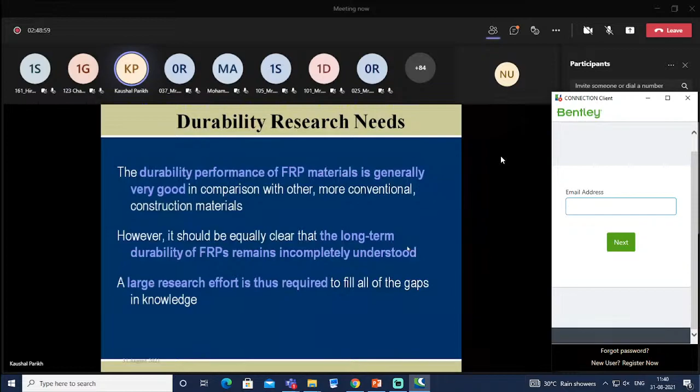As far as alkalinity is concerned, determination of rational and defensible standard alkaline solutions and alkalinity testing protocols, and a database of durability information need to be studied. Development of an understanding of alkali-induced deterioration mechanisms also needs to be studied.

The potential synergistic effects of combined alkalinity, stress, moisture, and temperature are not well understood, particularly as they relate to the creep rupture of FRP components. So these are the topics in which detailed research is needed.

Specifically regarding fire, non-destructive evaluation methods for fire-exposed composites need to be a research area. Fire repair strategies with respect to FRP need to be researched. Development of the relationship between tests on small-scale material samples at higher temperatures and full-scale structure performance during fire needs to be studied.

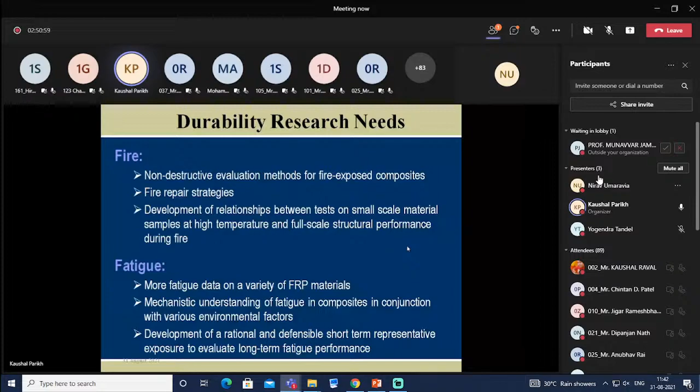So finally, we conclude that at any stage FRP is to be used for construction purposes, but before going ahead, we should study the design aspect using certain coded guidelines, and that coded guideline should meet our Indian environment, the Indian context. Also, higher research is needed specifically regarding durability.